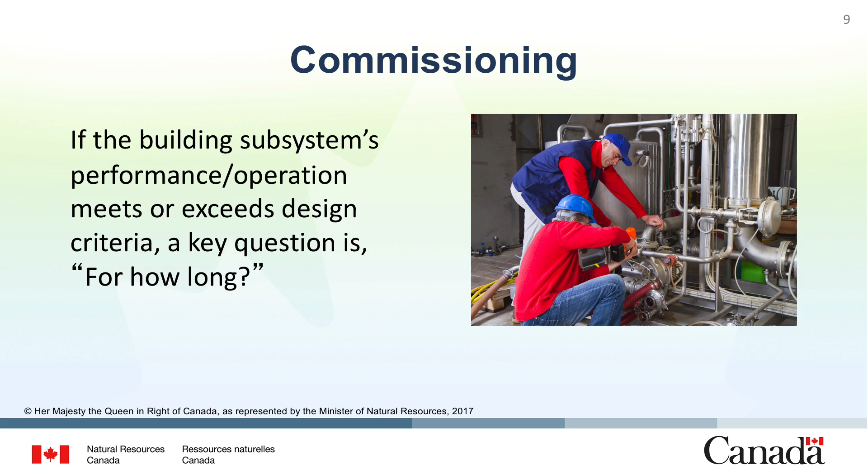If they do operate according to design, how long are they going to operate that way? Well, without proper O&M, it's been shown that the answer is not very long. A well-designed O&M program is critical to commissioning. It's critical to maintain system performance, to extend the equipment and component operational life, and for cost avoidance. Both the cost avoidance from an energy standpoint, which obviously is key, but also cost avoidance from having to replace the components and material at your facilities.

So what is O&M? What do they mean by O&M? Here's a classic definition of what many people think O&M is. Basically, just routine maintenance and fixing things when they break. Today, we'd like to propose a modern definition of O&M, a view that operations and maintenance is not just operations and not just maintenance, but really inclusive of 5 key areas: operations, maintenance, engineering, training, and administration. All of these are key to a successful O&M program.

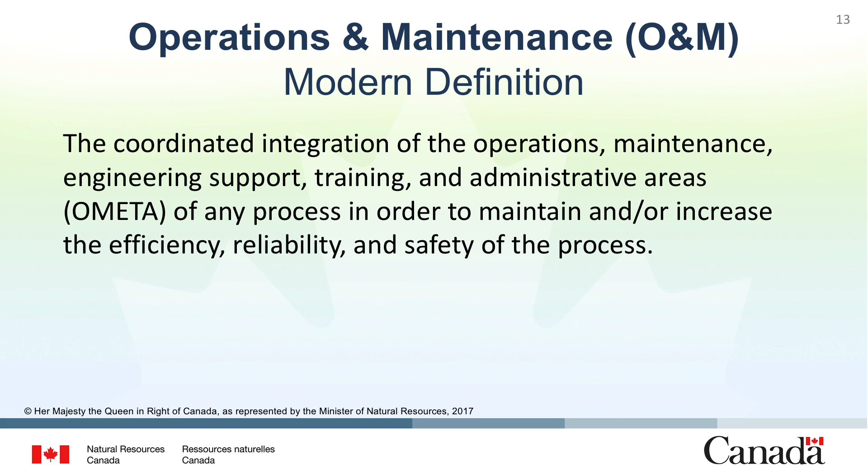We'll talk about how these fit together a little later, and how we can evaluate each of these areas to determine whether or not they're contributing as they should to the O&M program. Many surveys on O&M have been performed throughout the years, and the findings show there are several O&M issues that are commonly seen. These issues include operating equipment in manual override and incorrectly adjusting equipment. There are also frequent leaks in various systems, faulty control systems, and problems with HVAC equipment.

None of these issues are unusual, and I'm sure that many of you have encountered one or more of these problems at your facilities. These problem areas offer a great opportunity for energy savings. In fact, one U.S.-based survey indicated that energy savings of 5 to 20% are common and that most of the fixes are low cost or no cost. There are some simple O&M type repairs that can turn around and save some major dollars. Through this course, we'd like to promote an O&M first philosophy. Often at our facilities, O&M is not put first but last.

Frequently, the first place that management looks to cut costs is in the O&M budgets. But that's not the way to solve problems, save energy, or to save money in the long term. The benefit of putting O&M first is reducing energy consumption, as well as reducing unscheduled equipment repairs or replacements. We'll discuss that more later when we discuss reactive, preventive, and predictive maintenance.

If we place O&M first, we increase the reliability of our facilities. We'll also reduce capital cost because if things aren't breaking, we don't have to replace them. We're going to try to get the design life out of the equipment that we put in a facility and ensure that other energy conservation technologies achieve their expected cost savings. We validate and verify that the new equipment that we put in and our measures actually save and conserve energy.

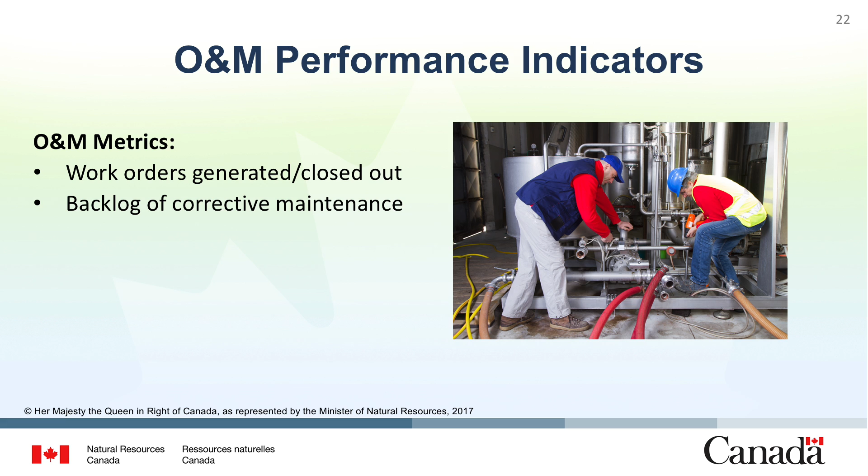Well, there are various metrics you can use, and here are just a few examples. They're not all-inclusive. Work orders generated and closed out, backlog of corrective maintenance, backlog of preventive maintenance, your safety records, and energy use. I mentioned it a few seconds ago. You can also look at metrics like your percentage of reactive maintenance versus preventive maintenance, your overtime hours, and dollars, the cost of parts, your replacement costs, and things like this.

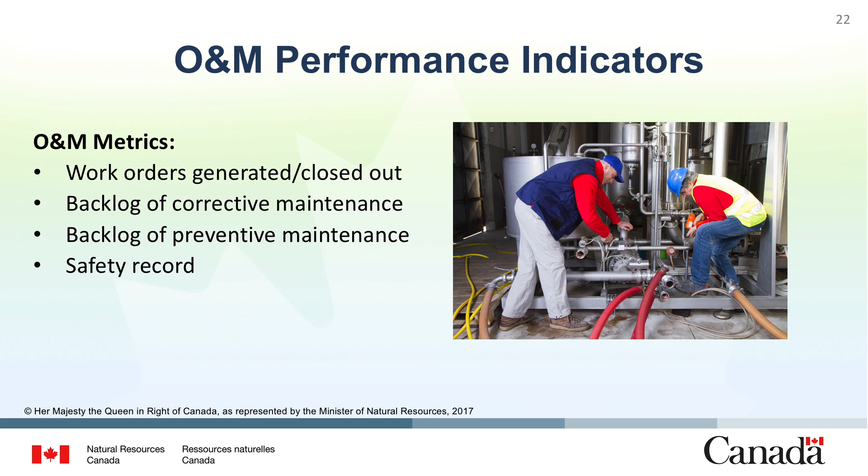And now we'll discuss effective operations and maintenance and program management, OMETA. Operations maintenance is not just operations and not just maintenance, but it's comprised of operations, maintenance, engineering support, training, and administration. Each of those entities are just as important as the other. You need to look at your operations and maintenance support and training administration and evaluate their effectiveness and identify any gaps that might exist so that you can improve your process and improve your O&M program.

Here are a few examples you might want to evaluate within your operation structure. Number 1, organizational structure. Does everyone understand it? Is it well documented? Is the interface of your operations program interfaced with other entities? They could be interfaced with the engineering support, with maintenance, and with administration. Is it understood? Is it documented? And is it well defined? Situations can arise where maintenance on specific components or systems is not performed properly because no one understands the job duty or whose responsibility it is to maintain and or operate that piece of equipment.

Number 2, plant evolution and testing. Are they authorized and controlled? Is someone in charge? Are testing and evolutions looking to ensure that those processes, when they're performed, don't cause a safety concern and they don't cause degradation to your equipment? Use approved procedures. Procedures are very important in operating a plant to ensure that the configuration of the plant is as it should be and that operations are performed in accordance with their best practices and that you're maintaining your equipment or operating your equipment in a manner that the designer intended those components to be operated. And we'll talk more about that when we talk about life cycle.

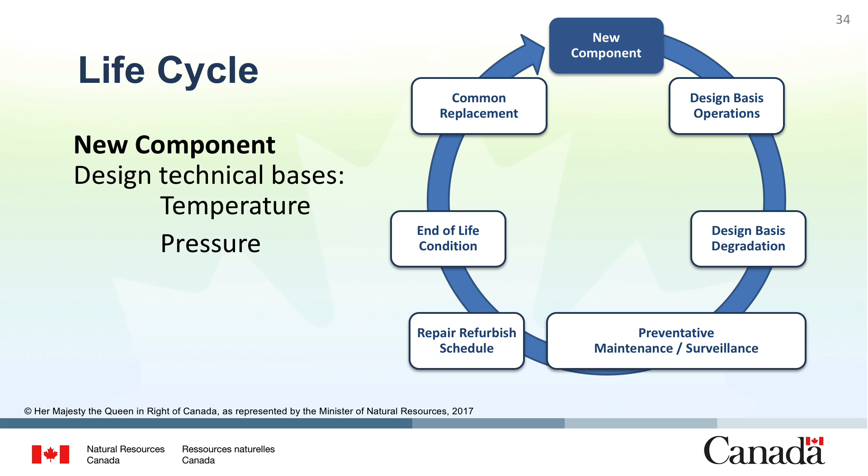The designer intended that that component operate in a specified operational environment with a specific temperature, pressure, clearances, vibration, etc. The component gets installed, and hopefully the design basis is used when the component is operated. Hopefully it's operated within the envelope that the designer intended it to be. The designer recognizes, however, that no component, no system lasts forever. It's going to undergo some level of degradation.

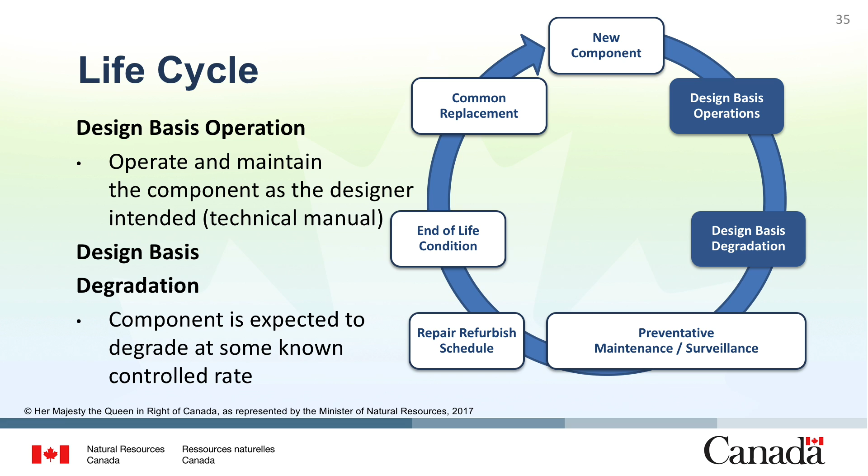If the component is maintained correctly, it will maintain the rate of degradation that the designer intended. There are some other things that have to be done to maintain that degradation rate. We have to perform various maintenance activities that the designer intended to be performed on that component. Similar to the design of your car, which intended you to change the oil every so often, the designer of most components intends you to perform some level of preventive maintenance on a regular basis.

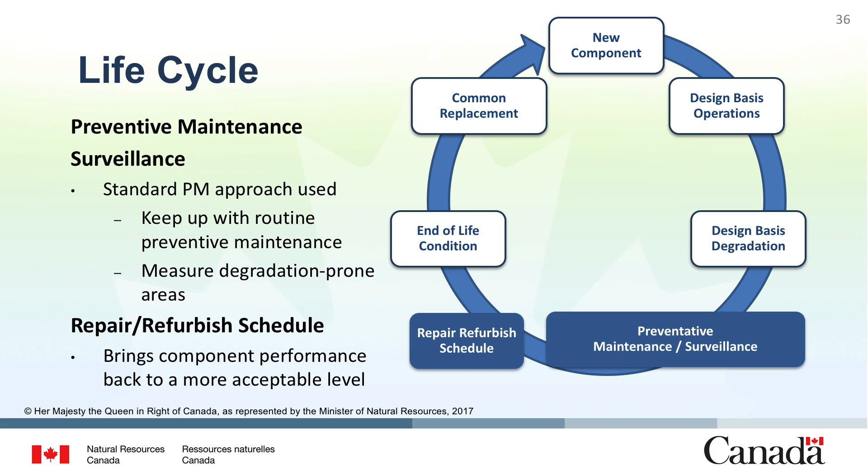There's also repair refurbishment. Wheel bearings don't last forever, fan belts don't last forever, so we have to refurbish or repair various parts of most components we talk about to maintain that component and get the design life out of the component. At some point in time, at the end of the design life, it will no longer be cost-effective to refurbish the component. It's worn out, and at that point in time, the component is replaced and the cycle starts all over. But what happens when things go wrong if we don't operate or maintain that component? Well, we'll shorten its life.

We could use a component in an incorrect application and induce stressors in that component that wouldn't normally exist. We could operate that component in an off-normal operation, outside the envelope that the designer originally intended. We could perform improper maintenance on that component, or we just don't do the maintenance that's required. All these things can add up and change the rate of degradation that that component experiences and lead to premature failure.

Now we're going to talk about maintenance programs and practices. What are maintenance programs and what are maintenance practices? Well, basically maintenance is trying to minimize the degradation of a piece of equipment and extend its life to what the designer intended. There are various maintenance program options. There's reactive maintenance, preventive maintenance, predictive maintenance, and reliability-centered maintenance. And we'll talk about each of these in a little bit more detail.

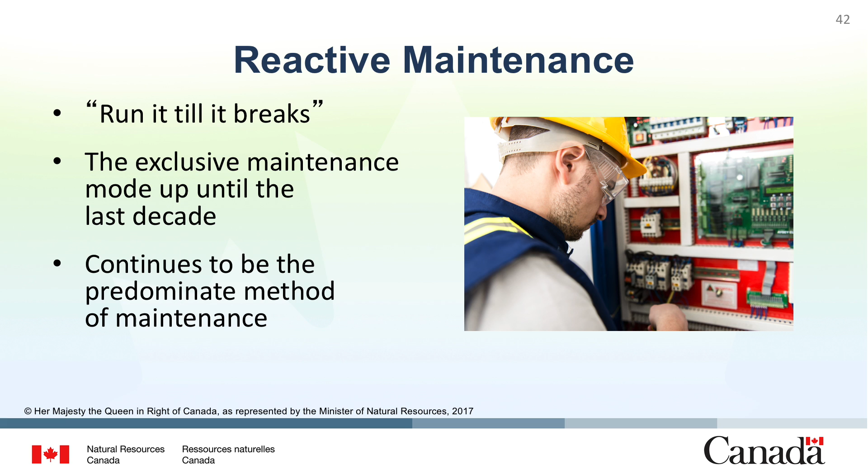Reactive maintenance is the predominant method of maintenance, but does very little to get the life out of a component that the designer intended. Reactive maintenance basically just says, run it until it breaks. It's been the typical mode of maintenance for not only the federal sector, but also the private sector for quite some time. Reactive maintenance advantages. This should really be perceived advantages. If nothing's breaking and there aren't any major issues at the facility, reactive maintenance could be perceived as an advantage since it costs less both in terms of staff and capital costs.

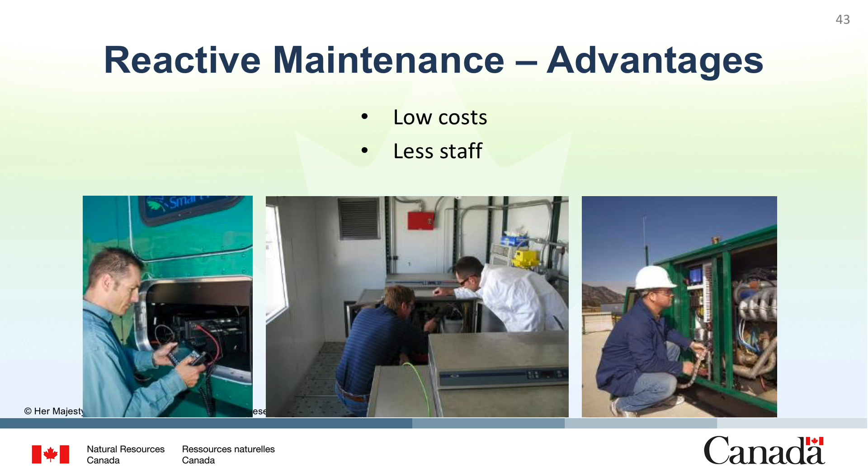In reality, it's the opposite. Reactive maintenance programs lead to unplanned downtime. You're not going to have a reliable building. You could also see increased labor costs if something breaks down outside of regular work hours. Repair and replacement costs. There are obvious costs associated with replacing or repairing the component. Also, there are going to be costs associated with trying to maintain parts inventory in stock to keep all the components working. With secondary equipment damage, when something breaks, it often causes something else to break.

As an example, cars generally have some type of timing belt or timing gear. In many cars, this only costs a few hundred dollars to replace and should be done, say, every 100,000 to 150,000 kilometers depending on the car manufacturer's recommendations. But if we wait, in some cases, this belt can fail and cause secondary damage to the engine, which may cost many thousands of dollars. It's a case of the primary component, the belt or chain, breaking and causing secondary damage, and an inefficient use of staff resources. Reactive maintenance is just inefficient.

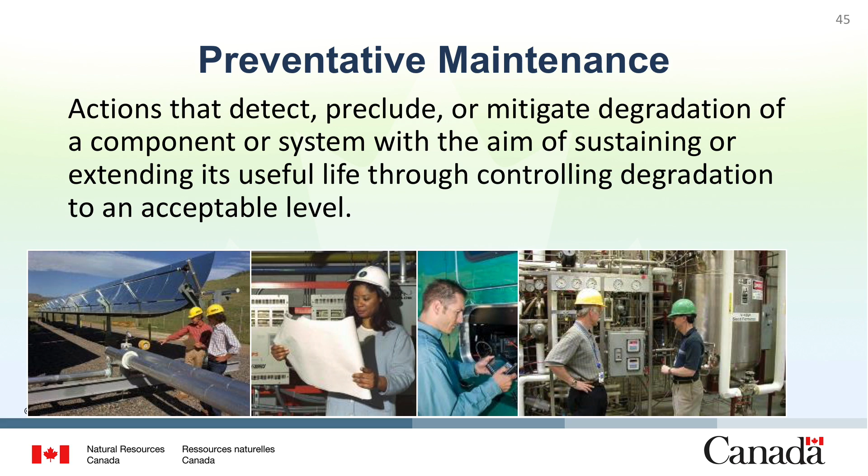The next maintenance option we have is preventive maintenance. What we are trying to do with any maintenance program other than reactive maintenance is to extend the life of a component to its design life while trying to maintain energy efficiency and optimum operation of our plant. Preventive maintenance type tasks that we talked about in the life cycle design are things like changing oil, replacing filters and greasing bearings. And these tasks are done periodically. Their maintenance period can be marked by calendar days, runtime, or parts produced. These maintenance activities are not performed based on the actual condition of the machine. They're performed through recommendations and engineering experience.

These maintenance activities are useful against degradation-type modes of wear, fatigue, and corrosion, and you might think of it as analogous to the automobile schedule of maintenance. We all know that when we purchase our new car and it's warrantied for 50,000 to 100,000 kilometers, the warranty is contingent on performing preventive maintenance. When you open the manual, it will have a maintenance schedule that says, every 5,000 kilometers, do this, or 10,000 kilometers, do this. The car manufacturer is confident that if you perform the preventive maintenance tasks and operate the car correctly, the warranty is going to last and you'll get the design life out of the vehicle. It's the same way at our facilities.

If preventive maintenance is performed correctly, it extends the life of the components and the system and saves money due to energy consumption. What are the advantages of preventive maintenance? We've already touched on a few. It's cost-effective, it can extend the life of our components, it saves energy, it increases the component life cycle, and it increases the reliability of the plant.

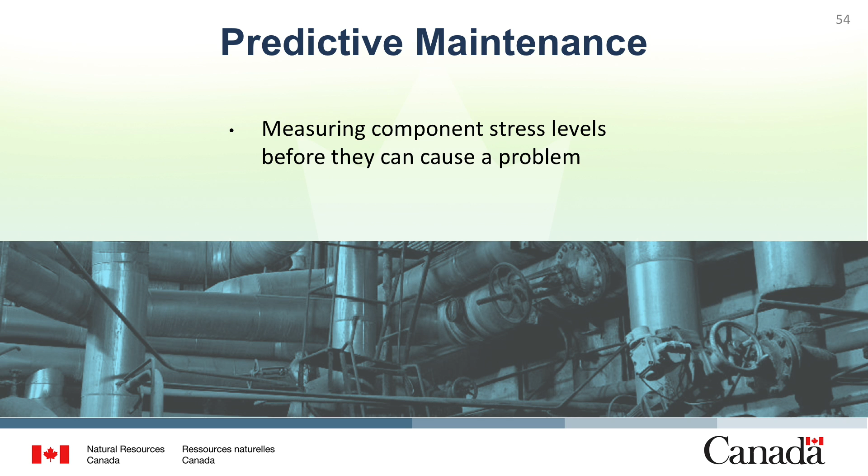Predictive maintenance is different than preventive maintenance since it assesses the condition of the machinery or the components through measurements. It doesn't rely on a schedule. It asks the questions: what type of condition is this machine in? Are there stresses within this component that are degrading this machine at a rate greater than design? Am I operating this machine in such a way that I'm shortening its life? If I am, then I want to take the action necessary to mitigate the stresses. In a predictive maintenance program, you would measure the component stress levels before they can cause a problem. You can measure component stresses through vibration, thermography, and oil analysis. You can measure the degradation mechanism and evaluate component performance through its power consumption.

Are there advantages to predictive maintenance over preventive maintenance? Yes, very much so. It can increase component operational life and availability. We're no longer guessing if stresses exist and taking maintenance actions. We're actually measuring whether they do or not. Because of that, it provides us the flexibility to say when and how we need to do maintenance. What tasks do we need to do? And we can schedule these tasks.

Since you know the condition of the machine, you can plan when you do the maintenance task accordingly. This makes it easier to schedule maintenance hours. You can schedule it during the day, and you don't have to schedule overtime hours and associated costs.

At the same time, you can order your parts. You know when you're going to do maintenance, so you no longer need to maintain that inventory, that stockpile of parts, and you can let your distributor maintain that themselves. This results in significant cost savings in many cases.

And if things are operating optimally, if your plant is operating at a high degree of reliability and things aren't breaking, you have a safe environment and your worker morale improves as well. There are also energy savings. If the plant is operating as it should be, the components are running efficiently and effectively, you won't have steam leaks, you won't be blowing through the steam traps, and the boilers will operate at a higher thermal efficiency because you've taken care of issues like scaling.

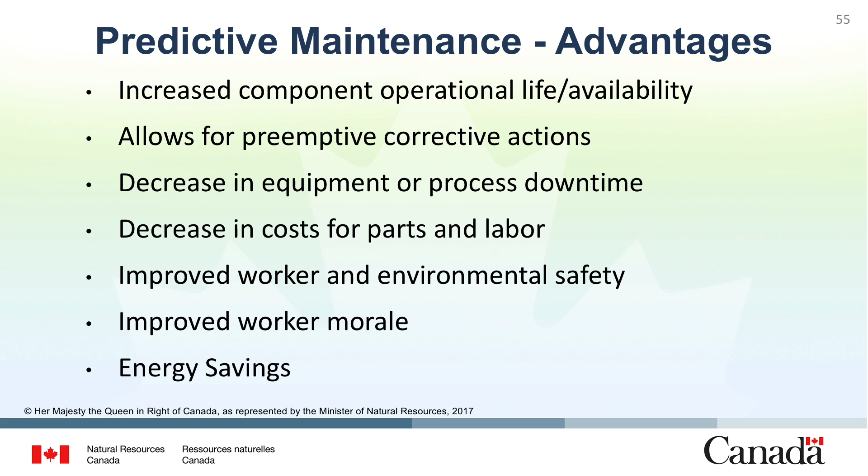Are there disadvantages? Yes, of course. Predictive maintenance technologies are expensive. Diagnostic equipment can cost thousands of dollars. One could easily spend tens of thousands of dollars on an infrared camera, for example.

There's also increased investment and training of staff. Predictive maintenance technologies are not only costly, they're not intuitive. They require some training to be able to use. Different technologies require different levels of training, but none of them are off the shelf. They all require some level of training, and there's a cost associated with that.

Often, the saving potentials are not readily seen by management. It's a hard sell to go to management and say, I want to buy an infrared camera for $60,000. It probably won't be in the budget unless you can substantiate that with some payback and some return on investment, that it's viable. In some cases, you can, depending on the type of facility you have and the type of maintenance that you perform with that infrared camera or predictive maintenance. In many cases, though, you can't.

And in those cases, you may be able to contract the services instead. That $60,000 infrared camera just turned into a periodic inspection by contract services for $1,200 to $1,500 a day, maybe once or twice a year. So you can glean a report and the information necessary to define the health of the equipment of your systems and use that to generate your needed maintenance activities downstream and prioritize them.

With reliability-centered maintenance, we can take predictive maintenance a step further. We recognize that predictive maintenance is costly as far as equipment and resources, training, and people are concerned. We also realize that reactive maintenance across the board is not a good way to do business. We understand that some equipment is critical to our mission and critical to, say, energy efficiency or, in many cases, safety. Once we understand and recognize this, reliability-centered maintenance then says, let's mold our O&M program around these differences and let's do reactive maintenance where it makes sense. You'll have to prioritize your equipment based on its importance.

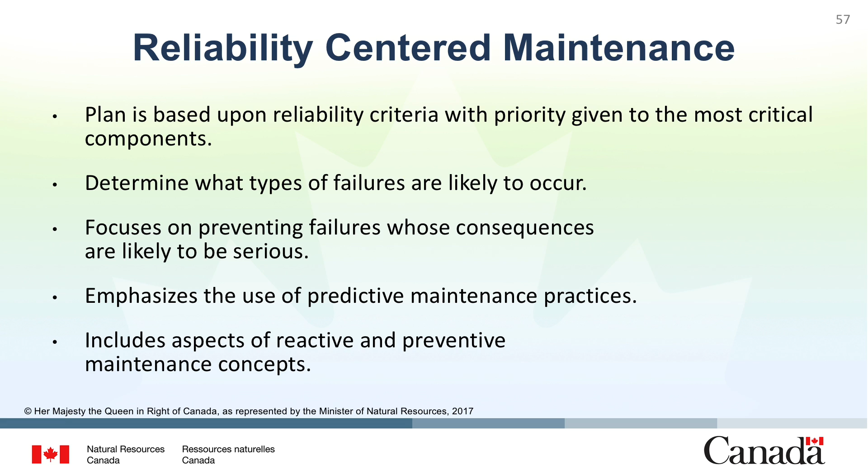Reliability-centered maintenance looks at the type of failures that are likely to occur within your key components or with mission-important components as you define them. These components generally have some type of failure rate associated with them just because of the nature of their function and how often they are used. The failures will have some type of effect upon your mission and upon what you deem as important. So what reliability-centered maintenance does is try to aim resources at predicting the failures that have the greatest impact to your mission or system. This includes aspects of reactive and preventive maintenance concepts. With some equipment, you may just perform preventive maintenance. With other equipment, you'll perform a combination of preventive and predictive maintenance.

Reliability-centered maintenance was pioneered by industries that need to be reliable, otherwise people's lives are lost. For example, nuclear power plants, airline industries, and fossil fuel power plants. These are the type of industries that need a high degree of reliability, but still have limited resources. So they need to define which equipment and which systems are important to maintain to keep the highest degree of reliability. And they do that with a reliability-centered concept.

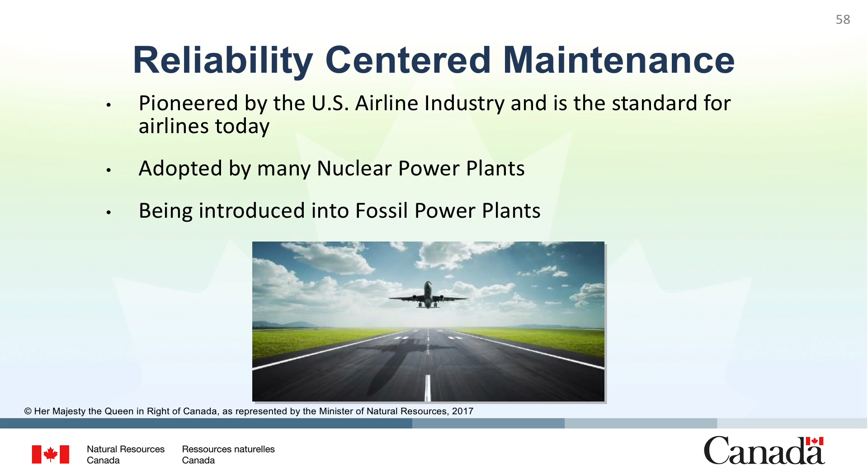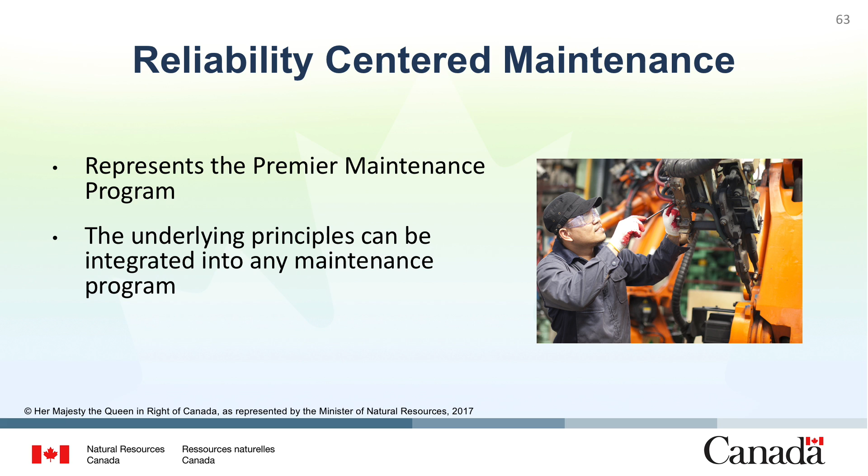Are there disadvantages? Yes. The disadvantages include workforce, equipment, and training. Many of the same disadvantages we see in predictive maintenance technologies, because reliability-centered maintenance is so predictive maintenance technology heavy. Reliability-centered maintenance is a premier program, and you can integrate its principles and backfit your own maintenance program. However, it will take some time and effort. So why change?

You can't have 50% reactive maintenance and have a safe and reliable system. Reactive maintenance requires extra inventory, and it costs downtime, energy, overtime, and unplanned equipment failure. The bottom line is reactive maintenance is not the way to go.

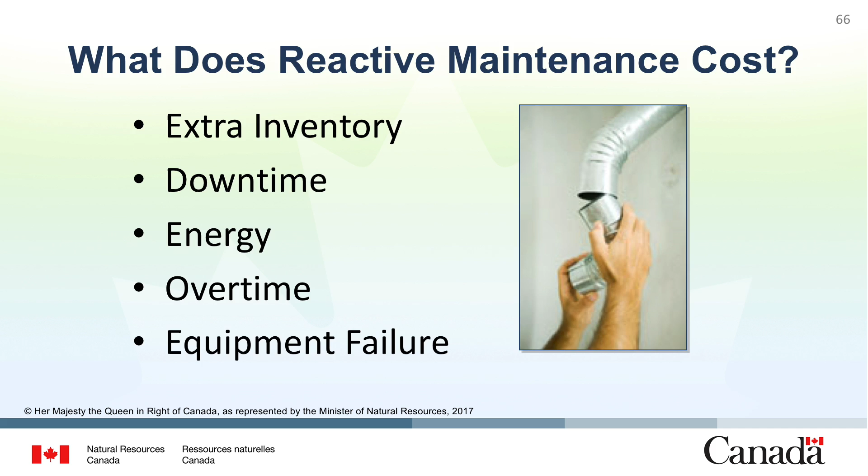Evaluate your needs. For some equipment, reactive maintenance is fine. For some equipment, you'll have to go to predictive to maintain its optimum reliability. And document your program results. Documentation is key to maintaining your system and maintaining your O&M program.